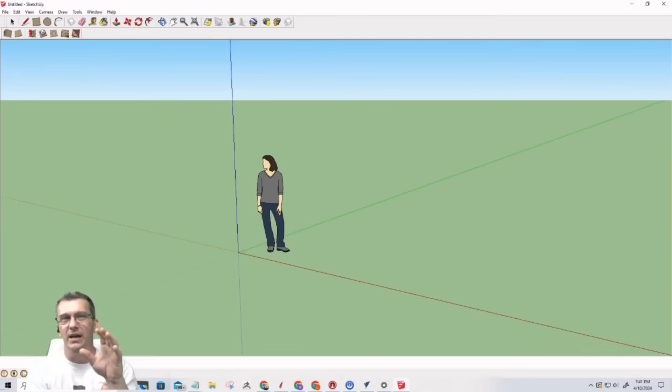When I first started with SketchUp, I knew absolutely nothing about this program. I'm going to give the biggest shout out I could possibly give to Jay's Custom Creations, Jay Bates. Jay, longtime friend, has a website, jayscustomcreations.com. In the SketchUp section of his website, he has a link to the version 8 of SketchUp that I'm working in here. Let me turn off the view axes.

He's got version 8, which is a free version, before they went paid and everything. And his tutorials - not just his tutorials on his website, I like going to his YouTube channel and his playlist. There's like 55 videos in his SketchUp playlist.

I saw one of his videos and I was like, oh man, I want to learn that program. I knew nothing about it. This was when I was just getting started, before CNC, before I got familiar with even designing in Vectric.

I downloaded SketchUp and literally watched every single one of his videos back to back in a row. I spent that time - they're short and to the point mostly, but I watched every single one of his videos. By the end of that marathon, I was absolutely proficient in the software.

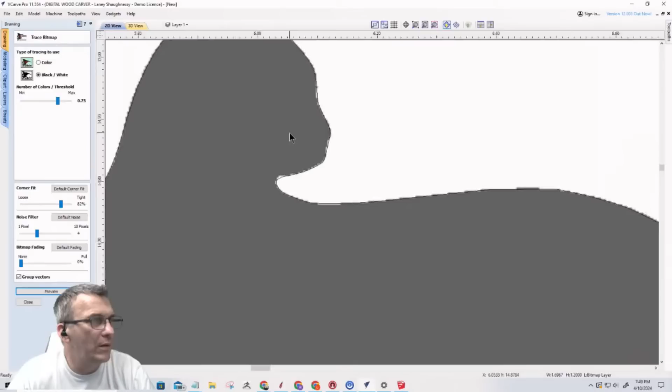Now I'm going to reduce that down to 2 and hit preview again. All right, it's not going to change in there very much, that's okay. Apply to lock that in, and close to close the tool. Then I'm just going to hit delete to delete the image.

So that will be one of the silhouettes that we'll end up using. Let's pull that over to the side for right now.

Now, on the other image, zoom selected, I have some other silhouettes I want to use, some paw prints and things like that. So I'm just going to do a full trace on all of them, then I'll be able to pull whatever one I want. Trace bitmap, turn the fading off down at the bottom, fading to none. I'm going to slide the bar up to 75, I just stick to that, I don't go past it. Noise filter default, I'm going to go 3 on this one. Preview, apply, and close, then I'm going to delete the image.

So again, these are going to be silhouettes, and I'll probably end up fixing the paw prints. But they're going to be silhouettes that I'll pick and choose from.

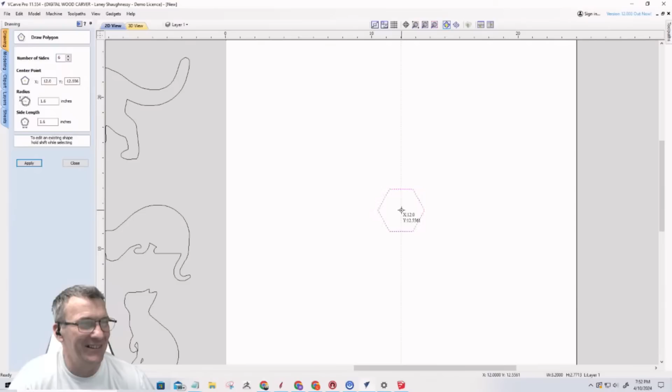Now, because I'm terrible at shapes and everything, the cat beds that are octagon shape, 1, 2, 3, 4, 5, 6, are 6-sided, right? And so what I'm going to do is I'm going to go into a 6-sided octagon here. And I believe that my angle here, and somebody can help me out with this one, I think it's 30 degrees, right? 30, 60, 90, 120, 150, 180, I think. Let me see here. So let me know if it's 60. Is it 60 or 30 degrees?

And what I'm going to do is I'm actually going to measure that. So we have a tool for that, the angle tool. And I'm going to measure from this corner, out here and then over to here. And that's 120 degree outside corner. And a 240 degree. So let's see here. That's 6. That didn't help me at all, ladies and gentlemen.

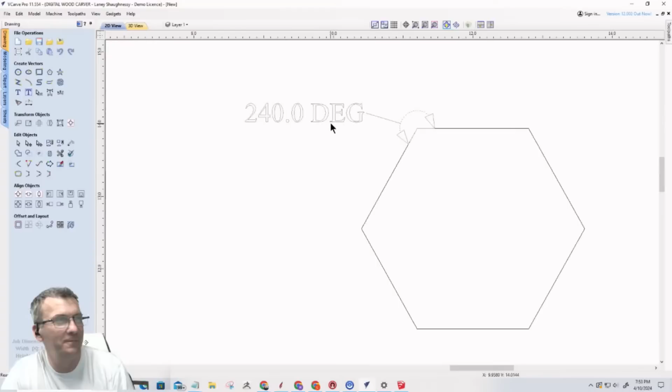Your angle. What is it, John? 60 degrees, Laney. It will be 60. Thank you so much. The way you can figure that out is if you take the number of sides, which is 6, divide it into 360 degrees, which is what's in a circle, a full circle. And that gives you 60 degrees. Yeah, thank you very much.

And I swear, I'm an intelligent young man, but I have the hardest time with shapes. Like when I'm cutting my angles and everything like that, it's like, oh man, what's that angle? So 60 degrees.

That's going for a hex or an octagon, Laney? Hexagon, 6 sides. Yes. Octagon would be 8 sides, right? Wait a minute. I said octagon, didn't I? So hexagon. Thank you very much. And that would be 60 degrees. And an octagon would be 360 divided by 8, right? That would be the math on that? Yep. That'll be 45. Okay, so there we go. See, that's why I got you guys around, to help me out with those things.

And the reason why I do that is in SketchUp here, when I end up drawing this part out, I want to be able to create my mitered angles or my angle cuts in the parts. Now, for the part, I'm going to take this here, and in the size tool, like I said, from long point to long point, I'd like to be around 18 to 20 inches. Let's just keep it simple. We'll go 20 on everything. That's going to be the height and the width.

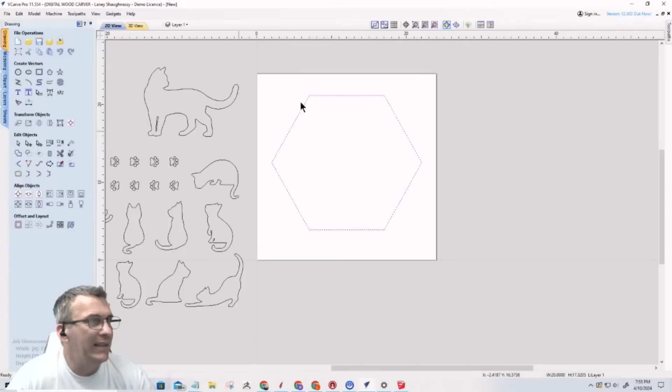So long point to long point here, I'd like to stay at 20 inches, and that's going to give me about 17 inches tall, and that's going to be plenty for this little guy. He's going to have about 5 or 6 of these things, and so there's going to be a 3/4 inch board here, and these miters right here. So bear with me just a second. So point to point. Missed that one completely. Let's try that again.

So basically, long point to long point, that's going to be my measurement, and then I'm going to be in 60 degrees, thanks to Charlie giving me that information. They're going to be 3/4 inch boards. And again, I want my outside dimensions to be 20 on the length, right? So if I offset this inward 3/4 of an inch, just kind of a mock-up, 0.75, sharp corners. We have my long point to long point measurement, short point to short point, and they're all going to be even. So I just need the measurements of one board and I'll be fine.

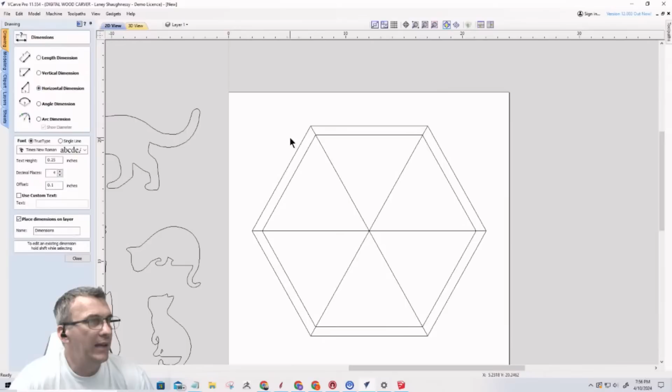With that, I should have from long point to long point, 10 inches, right? And just for kicks and giggles, short point to short point, 9 and just over 1/8 of an inch. And that's fine. I don't care about that. That measurement will come when I do the 60-degree angle. So 10 inches. And I believe, guys, if I look stupid on this one, it's just the length. If I measure from here to here, I'm hoping it's also 10 inches. It is. It's even all the way around.

Okay. See, I'm terrible with shapes, man. I'm great at building. I can build just about anything out of nothing, right? But on angles and stuff, which is terrible because we deal with angles all the time, anything outside of a miter, I get stumped on just a little bit every once in a while.

All right, let's get over to SketchUp here and let's clear this off. I'm going to create a rectangle. And this rectangle is going to be one of my boards. I'm going to use a 1x8 board, 7 1/4 inches wide. I'd like to have a little bit of room inside there, and I think 7 1/4 is not going to be too much. So I'm going to go 10, 7.25, zoom into that.

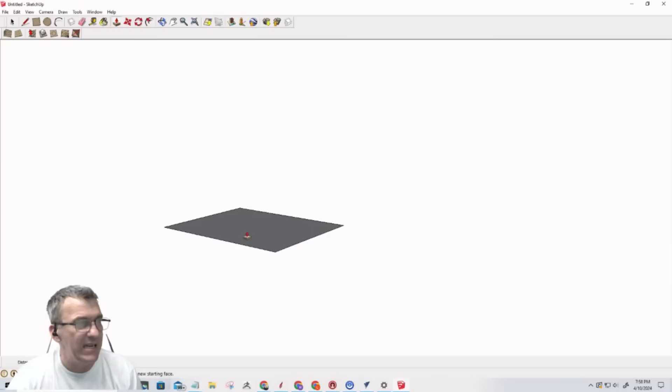I'm going to hit the P key on the keyboard for push pull, and I'm going to pull that up to 0.75. Okay. So with the tape measure tool, we have the 10 inches. So from here to here, 10 inches, and then from here to here are 7 1/4.

Now, I'm going to go into the camera view and I want a front view. So we're kind of looking at it from the side here. And this is my 10-inch side. And just to verify that again, this is my 10-inch side here. So now I'm going to go into the protractor tool and I'm going to click on this corner. And then I'm going to come over here. I'll click up here first and it's going to give me a line, and then I'm going to come over and I'm going to type in 60.

Okay. Now that would be 30 degrees on the cut. Two 30 degrees create a 60-degree angle. It wouldn't be a 60-degree angle. So let me redo that 30. I do know that much. So the angle is 60, but the half of it, that one board would be a 30-degree cut. And I'm going to do the same thing here. And that's going to also be 30.

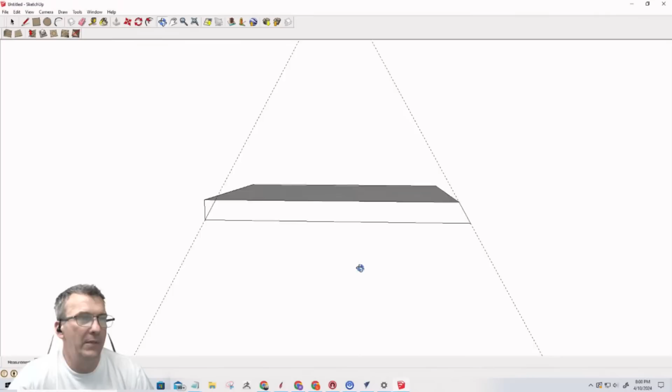Now, I can bring my line from here to here, from there to there. And then I can take my P tool, push-pull tool, and I can push that angle off there. And I can push that angle off there. So there's one of my pieces, right? So now I can get rid of the guidelines.

Now that I have the part made, I can come in and triple click on this. That'll select all the connecting faces. And then G for group to make a component. And I'll hit create. And now I have a component. So again, let's go to the standard view of the front here.

And I'm going to hit the letter M for move. And I'm going to grab this corner and I'm going to hold down the control key because I'm going to move a copy, the control key, just like in Vectric. When you're moving in Vectric, the control key moves a copy. So I'm going to snap a copy to there. Okay.

And then the Q, which I don't know where Q gets rotate, but the Q is the rotate tool, not the protractor. It's the rotate tool. And what I want to do with this is I want to click on this corner and then I want to kind of click right up this leg here. And I want to pull that up and snap it in place, right? So there's the two sides, right?

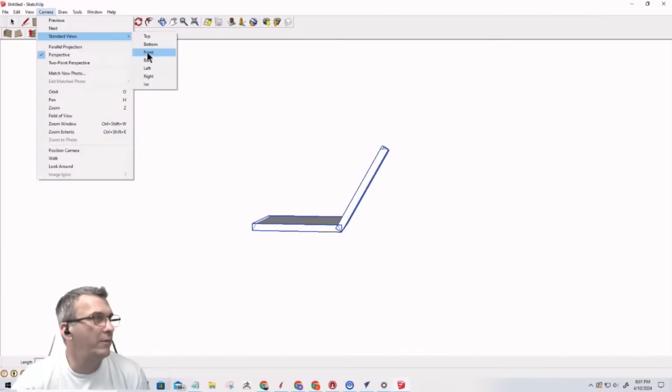Now I'm going to take these two objects, hit the M for move, but let's get back into a standard front view. Hit the M tool for move, hold down the control key. Now I'm moving both of these and I'm going to snap right to that corner. Q for rotate, rinse and repeat. I'm going to click here, click there, and pull that around.

And this is 4 sides. I really only need 2 more. So I'm just going to select those 2 that are there. I'm just going to hit M for move. Let's grab this one here and control key. Now this one's going to be upside down, but that's okay. I'm going to snap right there. Q for rotate, click here, and then spin that around. And if I did my job right, I should end up with one of those parts.

All right? Simple enough. I love SketchUp. I really do.

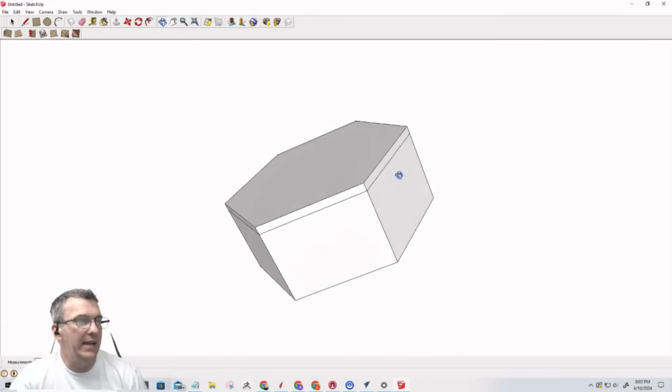Now, the cool part about this is I can come in here with my line tool and I can click here to here, to here, to there, to there, to there, and back to there to create that face. P for push pull and pull the 3/4 out, 0.75, enter. And that is one of my faces there. Triple click, G for group, click create.

And now I can hit the M for move, hold down that control key and drag a copy of it to the backside, right? And I really don't necessarily need a backside. So let me get you square there. When this hangs on the wall, I really technically only need something to hang the French cleat on, right? I don't need a full back panel, but I just wanted to kind of illustrate that. So now I have all the parts for one of those hexagons. Cool beans. All right, so let's go File, Save As.

Laney: Yes. Why not insert that back panel? Inset it in, make it, of course, 3/4 inch small all the way around, and then inset it in 3/4 of an inch. So then you wouldn't have an edge showing. Right, you wouldn't have any end grain showing. Gotcha.

That is a good point. Hold that thought. Let me see something here. Okay. Plus, it doesn't need to be 3/4 inch thick. It only needs to be like 1/2 inch plywood or whatever the case may be. Yeah, I'd make it out of...

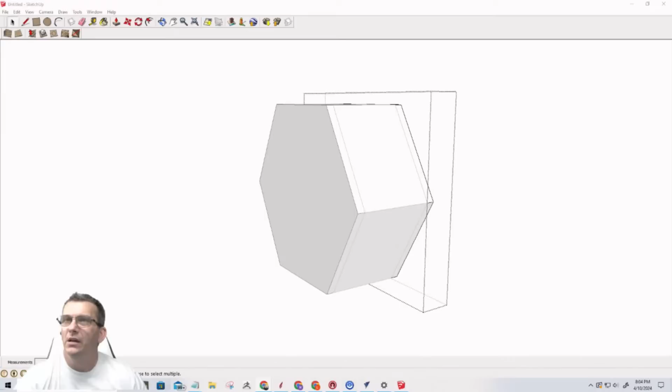So let me just pull this back on the screen again. I was kind of favoring this one because I really like this. I want to make this part too, kind of like the little bed that hangs on the wall, and I'm also going to make the ladder. But anyway, this one, they're using just stained plywood, and they're screwing it together, which is fine. But the plywood is overhanging. There's like a little lip, right?

And this has a little plexiglass panel on it. Thank you, Etsy, for that. And so I was kind of emulating that, but I don't want plywood. I already decided I'm going to make it out of hardwood. I could make it out of plywood, it would probably be one sheet, I could knock it out very quickly, I don't have to do a lot of glue ups. You could use cabinet plywood. Yeah, right, exactly.

But see, they didn't even miter, they just screwed everything to this front panel here with the gaps and everything. They didn't care about their cat, that's what it was. So, all right, let's go back over here.

So now if I select this part here and I hit S, let me escape out of this. Here we go. If I hit S here, I can grab this corner, and I believe shift will keep the axis. Bear with me a second. Function, Alt, Control, is it Shift Alt? Trying to see if there was one particular keyboard shortcut that would keep it centered, but not really. Okay, no problem.

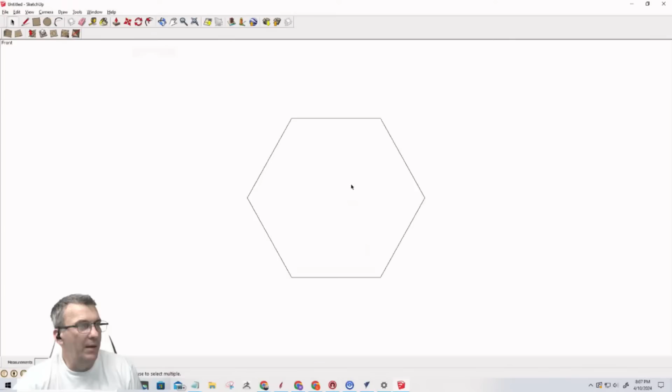So I do like the idea of insetting it. Well, what if you turned it face flat toward the screen and then tried shrinking it? That way you could see if it was shrinking in center and keeping it centered in your box. Right. So if I go front view here, you see it shrinking equally all the way around. If I hit Shift, that's just one side. Control keeps me centered. That makes it equal all the way around.

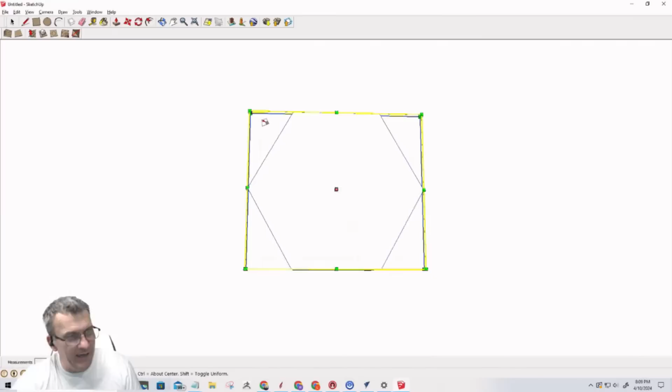Let me see, I want to see if it's the corner one here. I should be able to offset inward 0.75. No, that might have been a little too much. What would that be, 3/8 on each side? Yeah, because that would take 3/4 off all around. 0.375. What is that doing? Oh, I see, it's bringing it down to that size. I haven't done the scale in a long time.

Scale is 1%, 89, 87, 80, oh, it's doing it by percentage points. I don't even want to spend time thinking that one up. So here's what I'm going to do. I love quick and easy. I'm going to hit delete, take my line tool and just draw a line on the inside. It's faster for me than trying to figure out that tool. Then P for push pull. Again, it doesn't need to be 3/4, but I'll just do 0.75 for right now. Triple click, G for group, and then I'll move that in there. Oops, escape.

So yeah, that looks tight. That looks good. So 7 1/4. He's a little guy. 7 1/4 minus, if I go 1/2 inch and 1/2 inch, that's 1 inch. 6 1/4. If I go 1x10, that's a 9 1/2 inch board. 1 inch, 8 1/2. All right, I might do a 1x10.

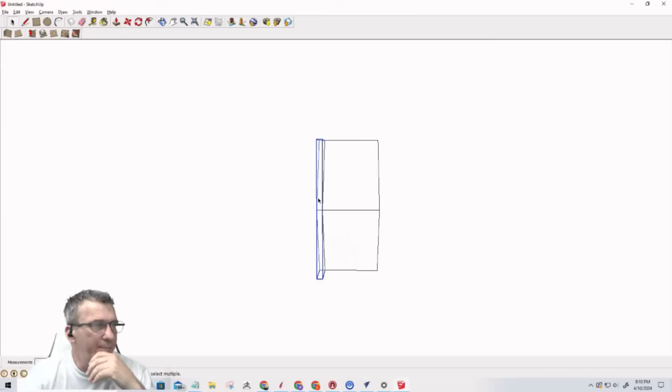So if I'm going to do a 1x10, when I do it to one, since these are copies, it will do it to them all. So this is already 7 1/4. I just need to move another 1 3/4 inches out. So 7 1/4 and 9 1/2 is another 1 3/4. 7, 8, 9, 1 3/4. Yep. So if I pull this out, it's going to do them all because they're copies of each other.

So 1.75, just pull it a little bit in the direction you want to go, and that'll pull that out. So I can deal with that. All right. And then I'm going to make the front panel, because there's going to be silhouettes and it's going to be open. There'll be openings and all that stuff, but I'm going to make the front panel inset also, because I like the idea of no end grain showing this way. I'm okay with the edge grain here.

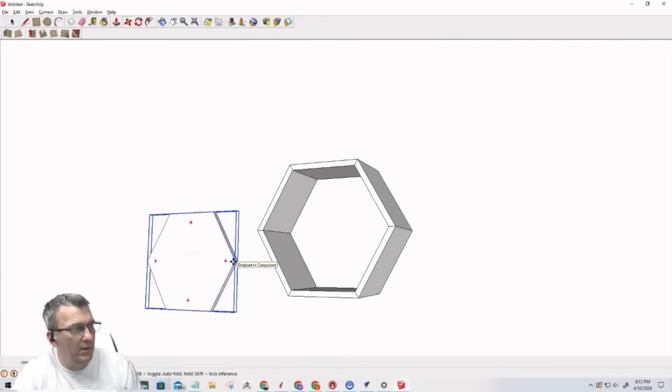So select this move tool, grab that bad boy, holding the control key down, let go of the control key, and then just snap that right there. So there's my front and back. Okay, so that's one part down. So that's going to be my hexagon. And I'll be able to do like offset cutouts if I want to make a window there, if I want to do the silhouette of one of the cats and all that stuff. We'll do all that in Vectric. Right now, I just want my raw parts. So that's one part. So let's go ahead and move that to the side.

Now, my next part, I want one of the square boxes. For the square box, I'll just buy 1x10s for it all. I'll miter these. It'll be mitered, so it's again nice and clean. And again, I want to stick to 20 inches, and this is 17. So I'll keep my 20, but I'll have different sizes on the height. So let's come over here. Let's go 20, comma 9.5.

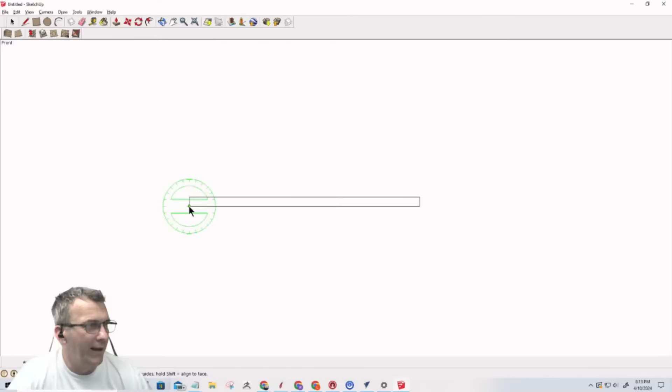P for push pull, 0.75, enter. And then let's get into the camera, standard view front, tool, protractor. The protractor tool is the only tool that doesn't have a keyboard shortcut. It's stupid. Anyway, here to here, and I'm going to go 45 because this is going to be a mitered box. From here to here, 45. So you just turn it in the direction you want it to go and then type in the number and hit enter. Take our line tool, go from here to here, from here to there.

P tool, push pull. And of course, the tools are up here as well. You can come and click them. I'm a big advocate of keyboard shortcuts in SketchUp. Okay. So that will be my top and bottom of my box. Let's select that. G for group. And then might as well hit the move tool and control key to pull that up. And this is the thing: when I pull it up, I can actually give it a distance, a measurement. So I'm going to go up 11 inches.

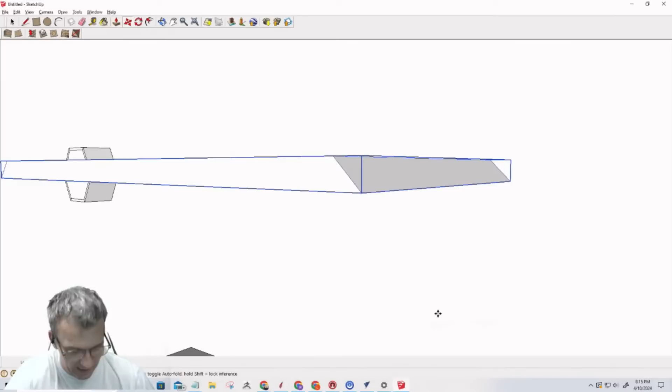Now, need to flip this one around. So if I right click on it, I can flip it along my red axis, my green axis, or my blue, X, Y, or Z. When I flip it along the red axis, that just swings it around this way. It doesn't do anything. It goes length to length. When I flip it along the green axis, that also doesn't make any change. Make sure I'm the only thing that's selected there. Yep. Whoa. When I flip it along the blue axis, that's the flip this way, right? So that's going to get my two miters facing each other.

Now, the cool thing about this is I believe I went straight up with this, and I didn't vary left or right or anything. So I can simply take my rectangle tool, and let me escape out of this and click off of it. And let me see if I can zoom into this closer so everybody can see it clearly.

I can just take my rectangle tool and click down here, come all the way up to this corner, and then over to that corner to create that piece. And then I can use the push-pull tool, and I can either pull this way or I can pull this way, right? Whichever way I want to go. I'm going to go ahead and pull this way and just pull it to there.

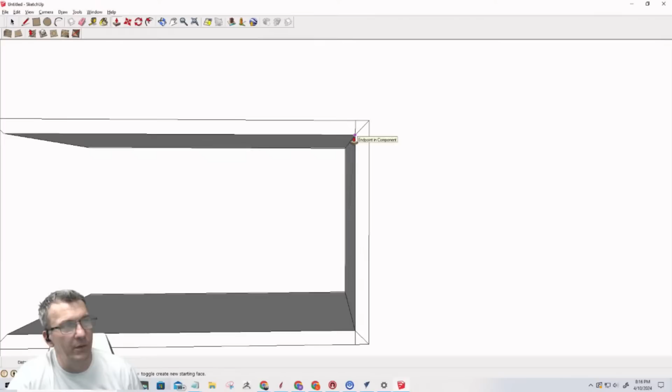And these are grouped. This is separate. This is still individual faces and everything. So when I come in here with my line tool, when I draw a line here, I'm drawing it on those open faces. And when I use the push-pull tool, I'm pulling that face, even though it's inside here and hidden, and I can hide this so you can see what I just did, hide, all I did was take that off. And the software is so intuitive and so smart.

It knows that I'm working with these components. I can't work with them unless I'm inside of them. I got to double click. So they're just there. It's like a grouped item in Vectric, right? And so I can draw that line. I can use the push-pull tool, push that angle off of there. And it's working with that open object, even though there's a component right there in the way, it's kind of ignoring the component because I'm not inside of it. And I mean, that is so intuitive and handy, it's great.

So push, pull, and then I can pull over. And you see how it says offset limit 9.5. It's saying, hey, you can only go 9.5 inches, and that's what I want. And I'll just type in 9.5 and hit enter, just so it knows that's what I'm trying to get to. So once again, if I take this bottom piece and hide it, you can see I've got that mitered board there. And so now group that one together, undo the hides, unhide all.

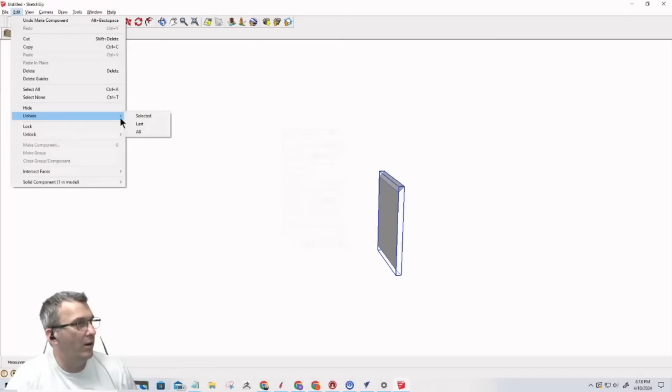Right? And now I can just move, hold the control key down and drag this down and snap. I grabbed it on that back corner. I can snap it right to there, even though it's backwards, but that's okay. I can flip it, right click. And this time I am flipping along the red axis to flip it this way. And I just need to pull that over and snap it in place. It's so fast. Hit your escape key or your space bar to get out of that tool when you're done doing what you want to do, or it keeps kind of moving parts around.

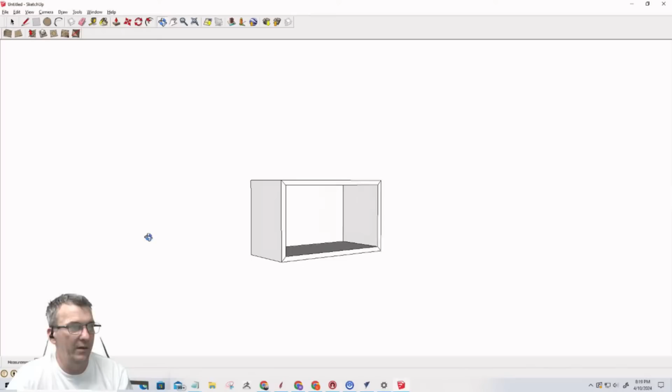But SketchUp, if you can just get familiar with the basics, drawing your shapes and extruding them and pushing them off, and then once they're shapes, group them together and stuff. Man, it's so great to be able to do that. And now in here, this is just a simple rectangle tool. So I'm going to take my rectangle and draw a rectangle on the inside there. And then right over here, I can just pull that inside like a drawer, right? But I just want to pull it 3/4, 0.75.

And triple click, because these are grouped, right? So it ignores the group. So triple click, and it's only going to select all the faces of that open object. And then G for group. And if I go move, I can move that out, and you can see now it just grouped that area right there, right? And then move, control key, drag a copy over here, spin that bad boy around. I'm going to grab it right on the back corner so I can just snap it, and it snaps right in place. So that's one of my boxes, right?

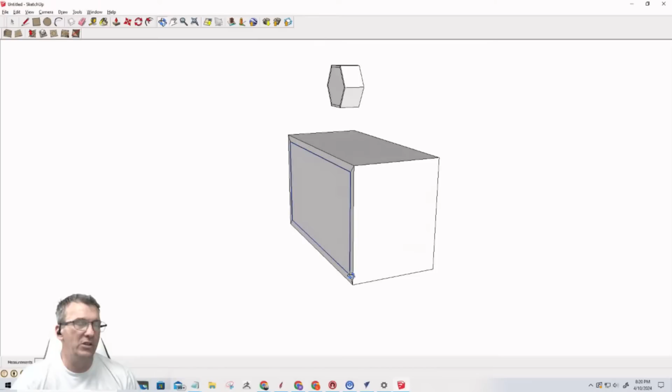Now, I would do this for all the different size boxes that I want. Now, if I said, okay, I'm just going to keep my box height the same so I can have a little entry door, I could draw all those vectors in here, and I can make all the little doors, openings and all that stuff for the silhouettes. But if it was just like a round opening or a square, I could do all that right here. And when I import it into Vectric, it'll have all those vectors there, or I can just draw them in Vectric, right? Figure out what I want to do. But just for preview purposes, I'll do this one.

I'll leave it alone and intact, but I'm going to hit M for move and hold down the control key and grab a copy of this. And I'm going to make this one same height, shorter. So we'll come in here and triple click to get in there, or a double click. Let me hide this face first so we can see what we're doing. Hide. This one, I'm going to scale it down. So this box right now is overall 20 inches in length. I'm just going to bring it down.

Really doesn't matter what size, I just want to bring it smaller. So I'm going to pull this in, and I'm just going to pull in until I think I'm happy. Now, I don't want this to change, and you see what happened because it's a copy.

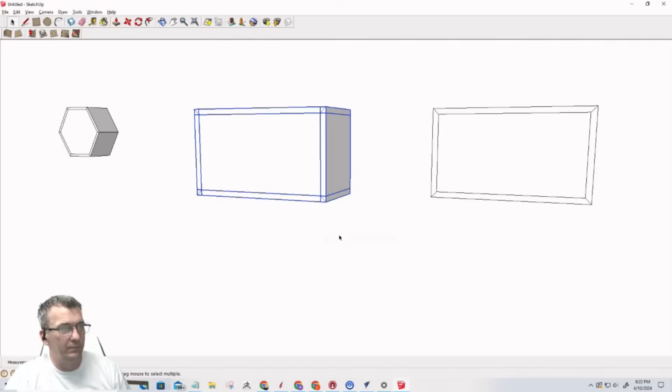I need to select this, right click, and make it unique. Make it unique means it's not the same as the other copy. So when I change something, it doesn't change my original, right? Because it'll change whenever you make a copy of it.

So I'm going to pull this in to here. Good with that. And then here, these guys right here, I can't push and pull an angle. That's the one thing that I can't do. So when I'm in this part and everything, if I try to push pull, it doesn't, it only wants to kind of go this way, right? And that would be kind of a cool looking box too. But it doesn't let me kind of push and shorten up and all that stuff.

And that's okay. I'm just going to make a 45-degree right here and cut these off and everything because I can do that. So if I come in with my tape measure, and with my tape measure tool, I can kind of create like guidelines, if you will. I can create a guideline right here so I know where that edge ends.

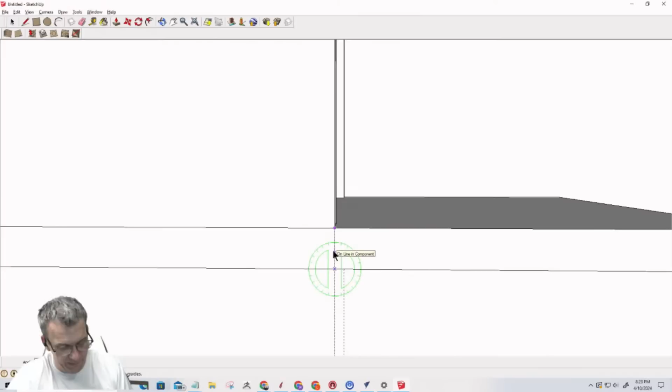And the protractor tool, no keyboard shortcut for that. I keep wanting to hit P for protractor, but that's not the case. I need to not protract at the bottom. I need to protract at the top. So hit escape, click here and down to there. And this is a 45.

Now all I have to do is just draw the line. Well, click into this part first, then draw the line. P for push pull, and now I can just push that whole thing away, right? And because these are copies of each other, not of this, but they're copies of each other, it does them both at the same time.

Love this program. All right, so edit, unhide all.

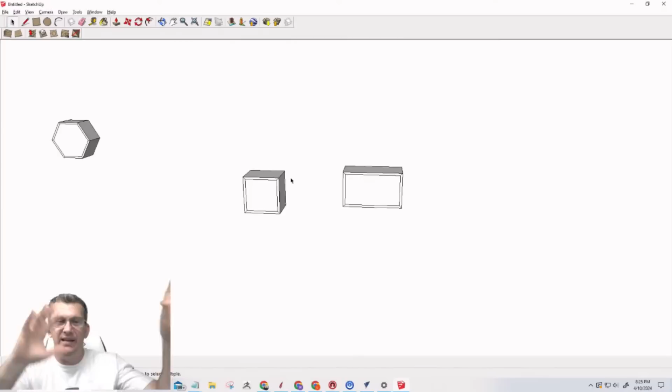To, we'll get out of that, unhide all, and then just move this face and snap it into place, right? So let's grab that, hit delete. So now I got a small cube. I'm going to stick with that because I can make multiple copies of that, different copies of that, right? That'll be just the 3 shapes that I need.

The last thing I'll do here is on this side here, I will go ahead and put the doorway in. So I'm going to take my ruler and I'm just going to come up 3/4 of an inch, 0.75. So it just kind of gives me a guideline of where, you know, my miter is and everything.

I'm going to, let's go another tape measure tool. Go another, yes, lay down and go back to sleep. He didn't like me slamming the thing.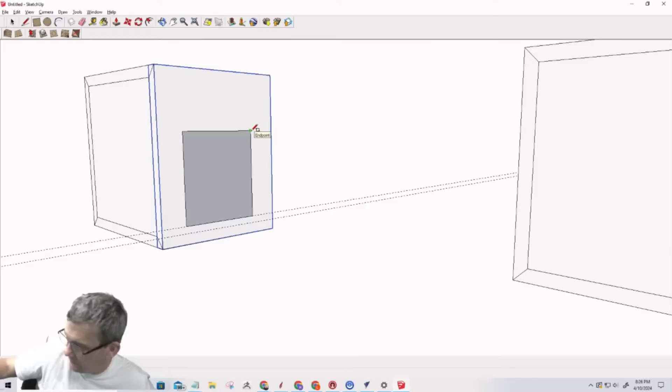So let's go another 1/2 inch, 0.5. Now there, I'm just going to pick a spot here. All right. Shh. Or you're going to go outside. Not outside, but out in the living room. All right. So here's this.

Now, once again, here's what I did wrong. I drew this component, or I drew this shape on a closed component, not on the inside. So I can't push that hole out or anything. I need to make sure that when I'm drawing shapes and everything, if I'm planning on pushing and pulling apart or something, then this part has to be clicked into. We got to be inside of it. We've got to be inside of it.

And so now I'm inside of it. And what I'm going to do while I'm inside here is I'm going to take my tape measure tool, and I'll kind of be consistent here. So let's go in.

1 1/4, 1.25. That gives me my little window. It doesn't really need to be that big, does it? Let me do that again. So let's go in another inch, 1 inch.

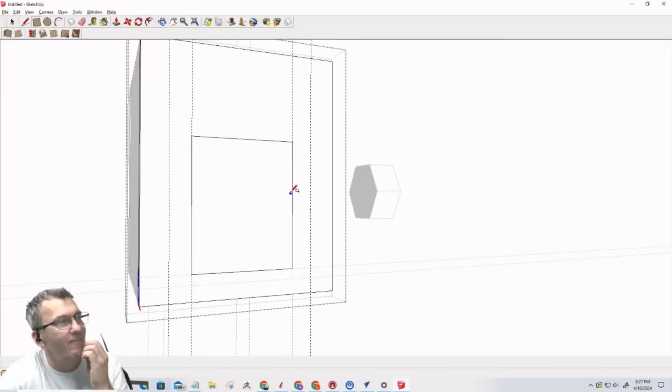1 inch, that's good. Take that rectangle, and I'm going to use my guidelines and just come in here, click there, and then draw an arc from here to here, pull that up a little bit. Now, once I do that, this is what I love about this program. Once I connect that arc to this line, I can just select it and hit delete, and it automatically joins those two together.

It's like almost taking the scissors in Vectric and trimming them together and then joining them and everything.

Now I don't need the guidelines at this point. I'll get rid of that one and that one, that and that. And I'm going to do a push-pull here.

Push-pull, and then 0.75. Now you can just push-pull and let go when it gets to the limit, and it'll tell you where you're at, or you can type in a hard number. I like to type in a hard number so it knows how far I'm pushing to. So now that part has those two openings there and everything.

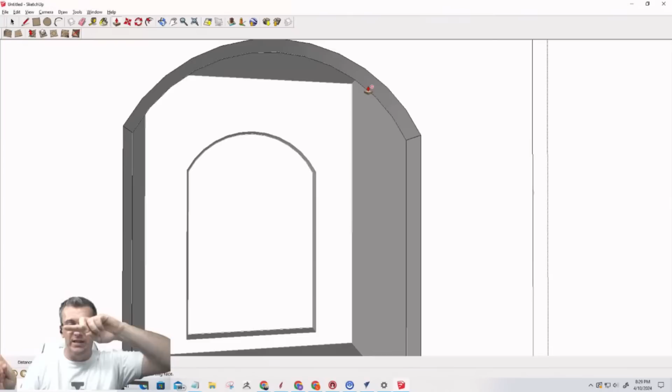Now these arcs are segmented. I don't know if you can see those straight lines. They're segmented in SketchUp. When we import these vectors into SketchUp, there's going to be an option to change arc segments to arcs and all that stuff, and I'll show you that when we import it in. So that's going to be my little opening.

We'll put a little silhouette on the front of these, and then I'll make the other opening in Vectric. So let's save the file and take it over to Vectric.

So let me drag this one. I don't have to, but let me just kind of put these in proximity of one another. Don't have to explode them, don't have to do any of that stuff. I just need to go File, Save As.

Now, the cat bed that I said I liked on the wall, I'm going to draw that in Vectric. Don't need to draw it in SketchUp. I'm going to draw it in Vectric because I want to show you that you can do that as well too. All right, so wall boxes.

Now I can come out of here, and in Vectric, I don't need this anymore. That was kind of my layout, right? I like if I can cheat anywhere I can, to get the information I need, I'm going to do it.

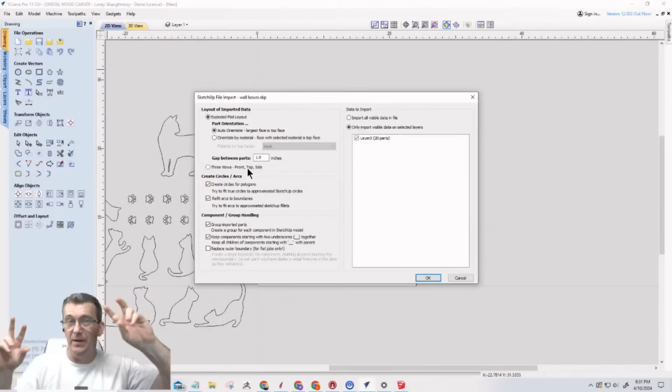The only time I would want to do that is if there's some kind of ornate edge I need to maintain, an OG edge or box over that I've drawn in SketchUp that I want to maintain to maybe do a 3D cut or something like that. Then I would import kind of a 3-sided view, right? But in this case, it's just going to be a flat view.

Now, I don't necessarily need to auto-orientate it by a particular face. But if I did, I could have painted with my paintbrush in SketchUp. I could come over here and, let's say, explode this piece right here. I could paint this outside face. Oops, hold on.

I had everything selected. I could paint this outside face a color, and that color is A06, right? And when I save the file, that color will be in my dropdown in Vectric. In here, I could say orientate this, and I could come in and find that because it'll know the color in the files. I could select A06 and it would bring all those faces up, right, if there was a bunch of joinery and things.

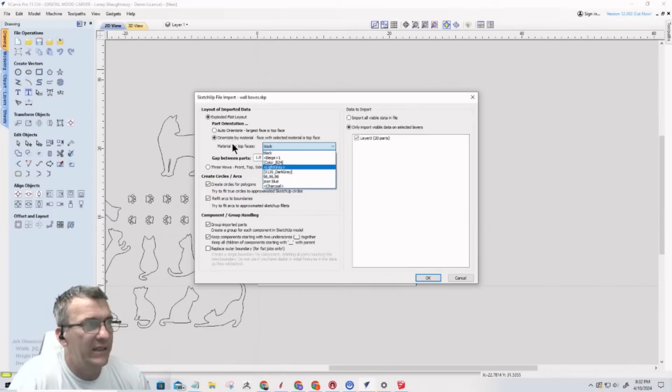But I don't need to do that. I just want it to bring them in. So auto-orientate—I'm going to be moving the parts around myself. So a 1-inch gap is fine.

Now, create circles for polygons, so those angles and everything—I want it to create arcs and circles. Refit arcs to boundaries, redraw arcs to boundaries. I want to keep my groups as groups and keep the components kind of together. And then there's 20 parts that are coming in, so I'm going to click OK, and it's going to lay out all of my parts here.

Now I've got my front and back. Okay, and this is where sheets are going to come in, right? I could create all my sheets and put all these parts on a sheet. Or if this was one big sheet and it was plywood and I was cutting all the parts out of that sheet, could do that too.

That kind of thing. Now I'm going to cut the angle cuts in here. I could just as easy take them over to the miter saw or the table saw, right? Tilt the blade, cut and everything. But I want to show you guys and girls how to use your chamfer tool and or just a router bit, right?

So I could lay everything out on one sheet if it was one big sheet and nest it to get the best parts to fit, right? Get it to nest and fit. But since I'm going to be gluing up kind of individual panels for this and everything, I'm going to create individual sheets. So some sheets are going to be long where I can cut all my sides for my little boxes out of, right? That don't need to be just a 24 by 24 inch. They could be just a 1 by 10, by whatever. And then some are going to be the square panels.

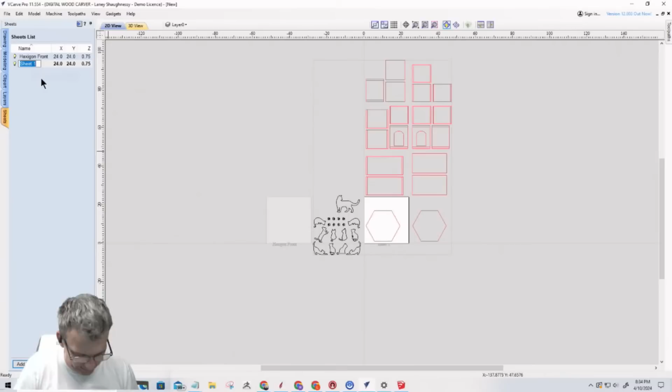So let's start with the square panels. So sheet 1 and sheet 2, I'll rename them. That's going to be my hexagon front and hexagon back. Is it A-N or O-N? I think it's O-N, right? Okay, so that's going to be those two parts.

And I'm going to take this piece here and I'm going to just move it to that sheet. Okay, and then let's make that sheet active for a minute, and let's get that centered on the sheet. Now I don't have any small parts in here that I could kind of fit, so I'm just going to go ahead and center this one on the material.

And that's going to be my 2 sheets. Now I'm actually going to be making one tool path, multiple cutouts on the front, one tool path, because I'm going to make 3 of these boxes, these hexagon boxes, but I'm only going to design 1. There's only going to be a tool path of the silhouette that gets cut out of them. I'm going to have a couple different silhouettes. And so I'll put them on their own layer and I'll create my tool path to cut one with this cat, one with that cat, one with this paw, whatever, right?

So that kind of thing. The side of my boxes, the inside of my boxes, they're going to have a silhouette on them too, on the front and everything. One of them might have a plain plexiglass window. I kind of like that concept too. But so that's going to kind of be that deal.

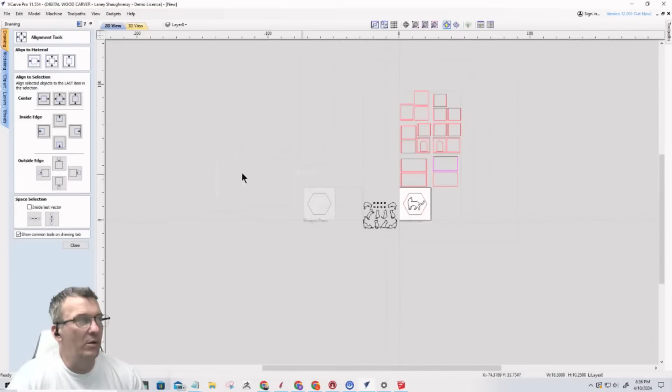So my next sheets for this, let's get up close and personal with these things. My next sheet, add new. This one is going to be my small box, my small box. I could probably get 1, 2, 3. I could probably get my box sides out of 1 by 10.

Let me take a measurement real quick, just a rough measurement. So out of a 36-inch board, I could get 3 pieces. All right, so we're going to go on the sheets. This one is going to be my box sides. Rename: box sides A. I'll just do A because they're going to probably be more than one board.

And edit that one. And I want it to be 36 inches long. I'm going to go 35, 35 inches long. I'm going to go 9.5, or 1 by 10, 9.5, 3/4 inches thick. Click OK. And I need 2 of those.

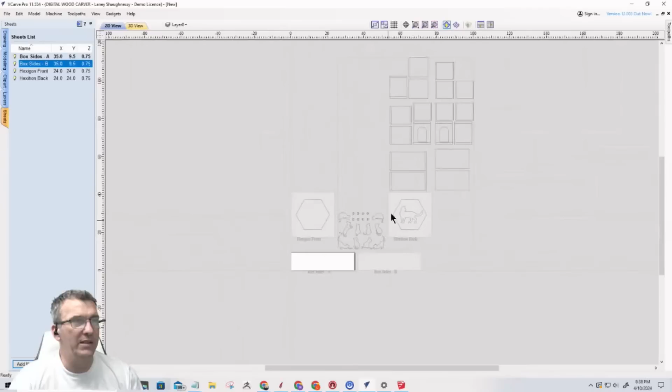So that's that. Now for right now, that's good enough for the moment. Let's go ahead and get back into our main sheet where everything is. And let's select this, and this, and move it to box side A. This, and this. Move that to box side B. Okay.

Close. Now, these vectors, everybody, these vectors are grouped together, right? So that's a group, and that's a group. Okay, so I should be able to draw a rectangle around the perimeter of my board here. And of course, I missed it by a long shot. Let me redo that.

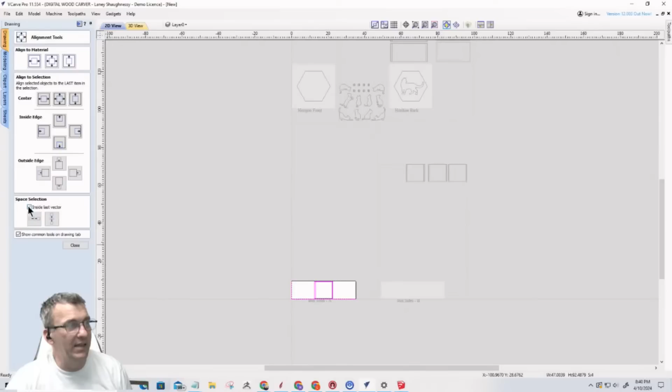Now I should, if I'm a smart boy, be able to select these 3 items first, this rectangle last, align them to the center of that last rectangle and stack them on top of each other here, and then space them inside that last vector horizontally, and it should lay them out and space them for me. Equal distance. So the distance from here to there, to there, to there, they're all equal.

So I can do the same thing here. Select, so hold the shift key down, select that rectangle, align to the center to stack, space, equal distance. All right. Now you have to understand that this is a mitered side, right? And it was imported in as a flat vector. So there are vectors on top of vectors here. There's the vectors for the inside face.

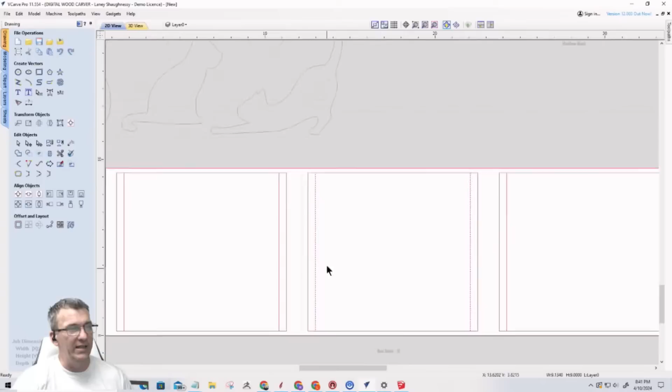Let me ungroup one of these so you can understand what's going on here. Ungroup. So we have a vector for the inside face, which is right here. If I were to grab that and move it for a minute, that's that inside face. Now there's also a vector here, which is the outside, right? Those two vectors, the little boxes here, create the offset distance of that angle, that 60-degree angle. So this line right there is the inside top of the angle, and this line here is the outside bottom, right? Long point to short point. That distance, that's what that is.

So when we're creating the tool path, we don't need this line. This is a rectangle right now. We don't need this span or this span. We only need this line and this line to cut the miters, right? We might need to add a couple of lines, but those are the lines we're going to be using. And then the outside perimeter is the profile cutout, right?

Now, of course, you could say to me, Laney, wouldn't it be much easier to take your 1x10, go over to the table saw, cut your 3 pieces, put your box together and all that? Yes, 100%. I'm just showing those that might not have a table saw or a chop saw, but only have the CNC they purchased, how they can create the tool path to make these cuts. But I'm strongly going to advocate that if you have a tool, use that tool for its best purpose. This tool is better designed for cutting out silhouettes and shapes and things like that.

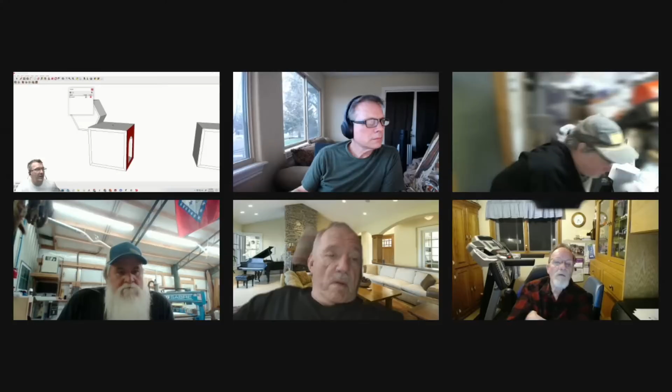So if we went over to SketchUp here and go to Window, Layers, I could have selected this part, and I could have added the... let me see if I can actually move it to a layer. Flip along, soften, zoom extents, dynamic components. No, I can just add it there. And that layer has a particular color. It's visible. And then I could have... what am I trying to say?

I could have drawn in that layer, and I could have named it side A, side B, part A, part B. And when I imported it in, it would have imported those parts on all their layers. So while I'm on a layer, I can't just, I wish I could take this and move. Let me see here. Bear with me just a second.

But could you have printed text on it, say like box A, panel 1, and then box A, panel 2, and then when you import it into Aspire, that would have been printed on that part, and just don't give it a toolpath? Yeah, I could have, and I believe it would import. I don't think it would import that. Let me see here. Let me hit edit, undo text.

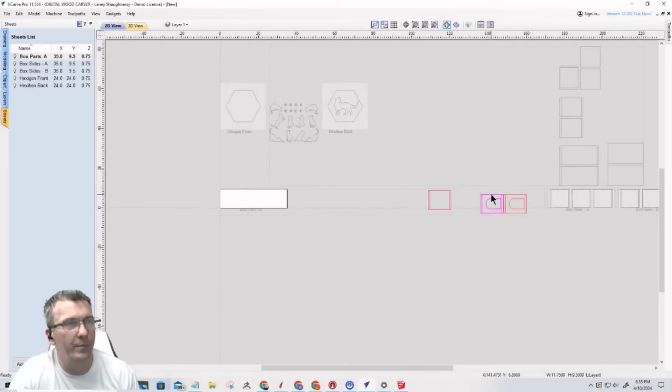What I'm doing now is this is going to be my box parts. And I'm going to take these 3 parts right here. I'm going to move them to that sheet. And on that sheet, I'm going to select this part, hit the 9 key twice, and I'm going to select these 3 items.

Again, I'm going to draw a rectangle around here. I'm going to select these 3 items, hold down the shift key, select that rectangle last, align to the center. Nope, that was dumb. Align to the center. There we go. And then space equal distance. Now these are just pushing that 35-inch board. So let's go ahead and change that sheet size, edit. And I'm just going to give myself another inch, 36.

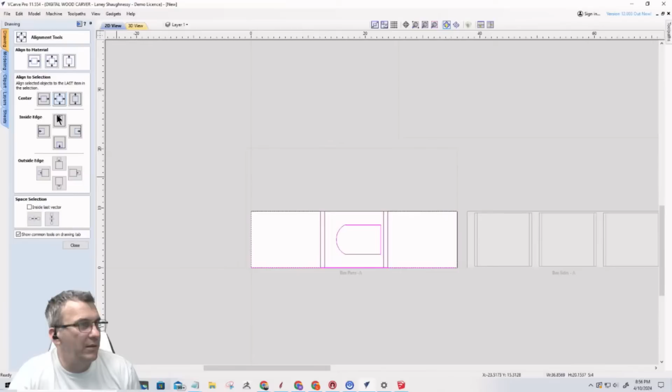I'm going to come in here and select that rectangle again. Let me do that. Just going to pull them off for a second so I can extend this one out that extra inch. Okay, select these 3 items, select that, and once again, align to the center, and then space, and that'll give me plenty of room. I should have plenty of room to get a bit in there. We'll find out. If not, then I'll change different parts. So now it comes out, just kind of laying the parts out.

So now here, let's do a tool path on this. We're going to ungroup these parts. This vector is all by itself. That's good. This is my perimeter vector. And then the inside vector is that distance there, and there is that 45-degree miter distance, right? Well, I don't need the top line and the bottom line on this shape. So I'm going to go into node editing, right click and delete that span, and then delete this span. So what I should be left with is one line over here and one line here. Okay.

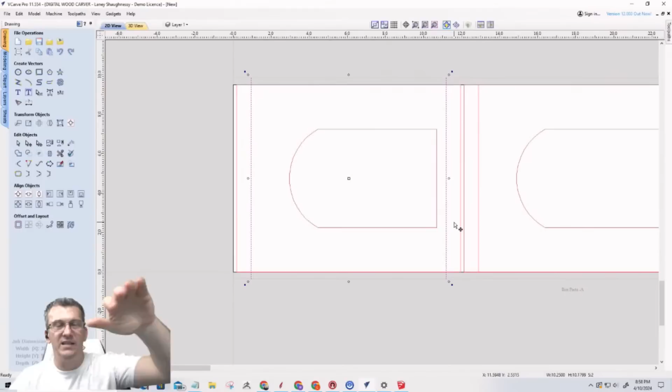On these lines, let's get out of node editing mode. I'm going to hold down the shift key and, oops. Well, bear with me. I'm just going to hold down that shift key and extend them slightly past the edge of my board, because when that 90-degree bit comes to do the cut, I want it to go past the board to give me a nice clean cut. Again, this is under the assumption that I'm miter cutting this on the CNC versus the table saw or chop saw or radial arm saw, that kind of thing.

So now I've got my 3 vectors for my tool paths: my profile, my chamfer, which is going to be the miter cut, and then my pocket cut right here. So let's look at the tool paths on this. We'll do the window first, pocket tool path. But did it arch that window and take those segmentations out of it automatically? It did. When we imported and told it to change polygons to circles, it created those arcs. Got rid of those segments automatically right upon import.

So yes. I'm going to type in Z equals up here, 3/4 inch. I'm going to select that. I'll be using a 1/4 inch end mill, and this is going to be my door cut underscore 0.25 end mill. Calculate, and that's just going to be that cut.

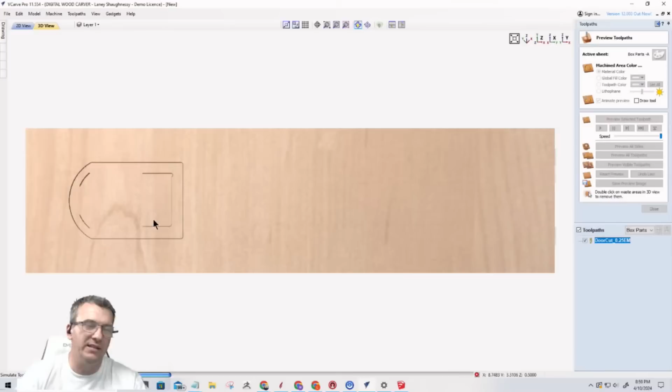Now, I don't need to do a pocket cut. I'm a goofball. This is a profile cut. I'm cutting the door out. There's no sense in wasting time on a pocket cut. So let me stop that. That was an idiotic move on my part. That is going to be a profile cut because we're cutting it out. So let's go back into the profile toolpath.

Zero, 1/4 inch end mill, inside the line. And I'll throw a tab in there. Edit the tab. We'll go 2 tabs. Right there will be fine. And then door cut out, 0.25 end mill. So we'll go ahead and reset that, preview that toolpath, and cut that part out. That will be the cutout.

Now for the chamfer toolpath. If you don't have version 10, 10.5, 11, 11.5, when the chamfer toolpath came out, if you're still rocking 8 and 9, I'll show you how to create that 45-degree miter cut with a 90-degree V-bit without the chamfer tool. But here we're going to start at 0. We're going to use a 1/4 inch end mill. Get down to my, why am I not seeing my end mill category?

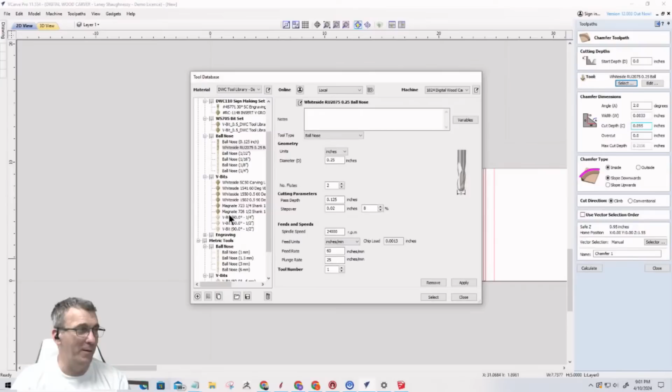Because I'm not looking for an end mill, you goofball. I'm looking for a miter bit, a V bit. I was like, why am I not seeing my end mills? 90-degree V bit.

And then on the line here, now this is very important, okay? The line, I don't know how well you can see that, but the arrowheads are pointing to the deepest part of the cut. This 45 from the inside of my board is coming down, out and down, right? So the arrows, the lines need to be pointing outward, which they are, but they need to go the full,

3/4 of an inch. And so 0.75. So 3/4 of an inch wide, 3/4 of an inch deep. Those arrows should extend right to the edge of my board here, my profile. Okay. So there, and if I hold the shift key down, wrong direction, right? So that's because my start point needs to be swapped around.

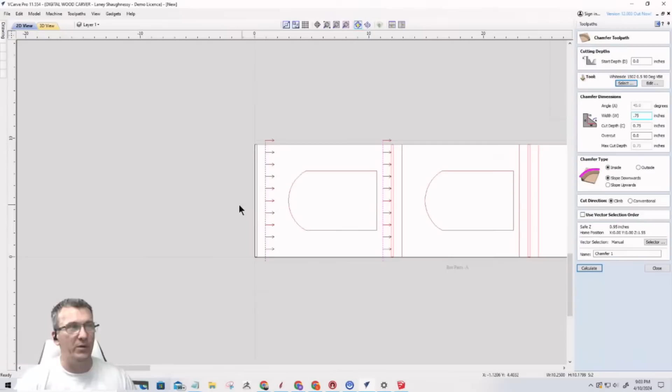Let me close this for a second. And in node editing, this start point right here needs to be down here for this line. So make this one the start point. Make that the start point. Now, when I go back into that chamfer toolpath and I select those lines, we're going to have our 1/4 inch end mill, or a 90-degree V-bit, sorry.

We're going to be 3/4 of an inch on the cut width, and it'll automatically set the depth because it's a 90-degree bit, keeps it even. It's not going to be an outside cut cutting in, upward or downward or anything like that. It's going to be an inside cut. We're starting on the inside, working our way out. And we are sloping downward, inside sloping downward.

And so when we calculate that toolpath, that's going to create that miter cut there. All right. And now, we're going to be doing that on each of these parts, right? So I could technically come in here and go into node editing mode, delete that top span, the bottom span, same thing for this one, delete the top span, the bottom span.

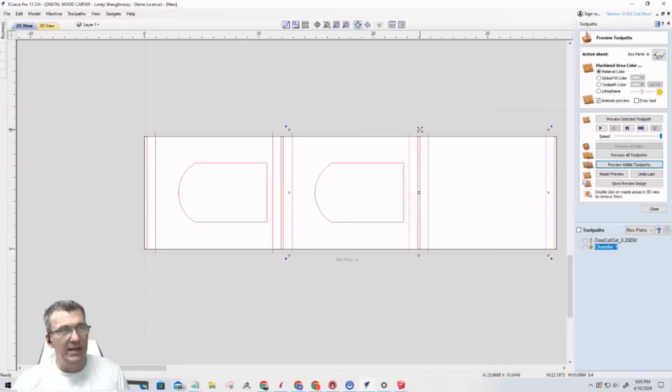On my lines here, let's get out of node editing mode. On my lines, I can extend them out. I'm going to extend them to the same length as they are. I'm holding that shift key so it's the same size. And what I did is I grabbed this to size it, and I just pulled my mouse over to the end of this line that was already sized. So it brings those lines to that same height. Make sure you're zoomed in.

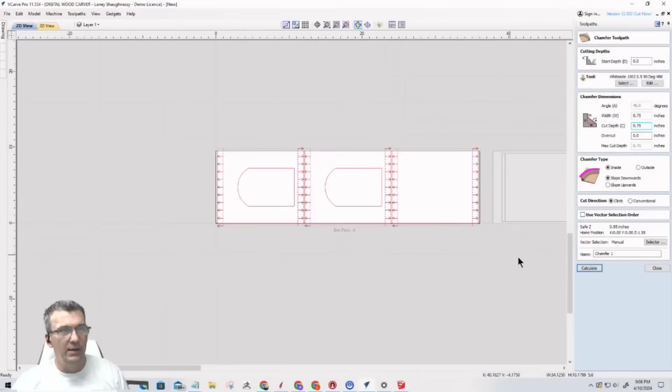And then now every other one, I need to go into node editing mode, make the start point, skip that one, and then this one, make the start point. So let's go back into that chamfer toolpath, hold down the shift key, select that, that, and that. Let's try that again. There we go. Select this line, that line, and calculate. Okay. Preview that toolpath, and that's going to create each of those miter cuts.

Okay. And then, of course, on that profile cut, the door cutout, I could just as easily hold down the shift key and select this door, go into edit my tabs and throw in the tab here and here, and calculate. Right. So those parts, they're done. Now these, front and back, or side and side, and then another side of a box, these are all still box sides. They're not the front and the back and everything.

Now here for the silhouettes, let's go back here and just look at this one real quick. This is a front or a back, that hexagon shape and everything. So this is going to be a silhouette, and this is going to be a profile cut, cutting on the inside. And I'm just going to use an 1/8 inch end mill to make sure I can get kind of tight in these corners and stuff. And depending on what animal, I'll use an appropriate tool for the job. And if I can't, then I'll size this up to where I can. But I should be able to use an 1/8 inch on all these.

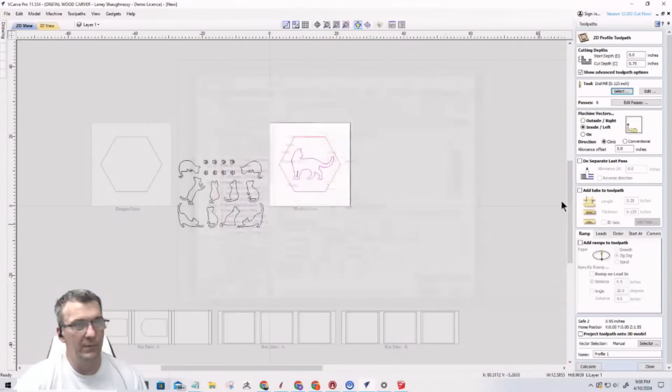So this guy here would be a profile toolpath, cutting all the way through. I'm going to use an 1/8 inch end mill on the inside of the line, calculate, and then I'm going to do a profile toolpath on the outside of the line.

If I didn't want to do tool changes and stuff, I could go ahead and just use the 1/8 inch bit, because I have a 1 inch long reach bit. I could do an 1/8 inch bit on the outside profile as well, or I could switch to a 1/4 inch end mill. It just depends on the situation. I'll leave it at that.

But these are going to be inside, and I am confident that in my machine and its setup, when it cuts this part and I glue my hexagon together, this part's going to fit. It's probably going to be a little bit tight. I'm not worried that it's going to be undersized with a gap. I'm confident that all my parts, as long as my material's the right size, will be the right size.

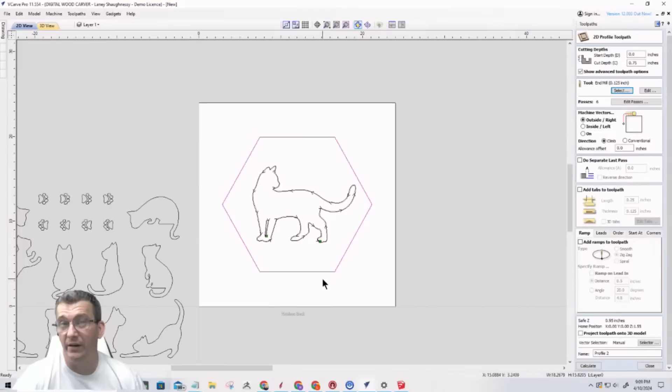Now here's where it would vary. Let's say I glue up my hexagon pieces. Let's say I were cutting them out of a glue up, or out of a piece of lumber that I ran through the drum sander. Let's say it was rough lumber, some pretty wood I want to make this box from, and I don't hit 3/4 of an inch. This design was designed on 3/4 inch boards, 6 of them.

If my boards are thinner than 3/4, that hexagon is going to be a different size. So if I drew it for a 3/4 inch board, but I run it through the drum sander and I'm 0.70, 0.68, whatever, then I am going to have a gap when this gets cut out. So if you're going to use the CNC to cut your parts out, make sure your parts are what you drew and sized it up for.

Otherwise, go back into SketchUp and make those alterations. Get all your milling done, jointing and facing off, cutting down to size, running through the drum sander. Get all your square boards made if you're working from rough timber. Once those boards are cut down to size, make whatever alterations you need in your design. If you drew your design for a 3/4 inch board and come out with a 0.7 inch board, you'll wonder why that part isn't fitting. There's going to be an air gap.

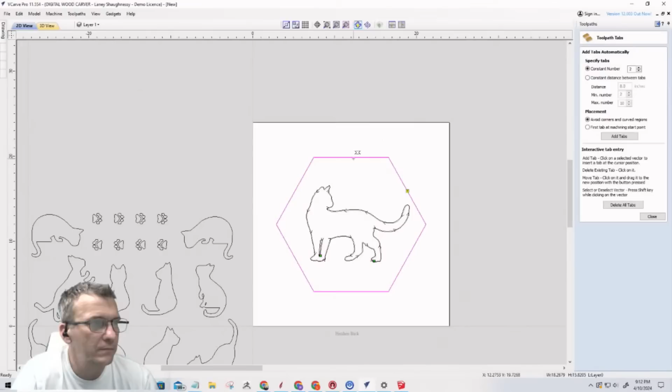I'm going to work with a pre-sanded four-side board straight from the box store. I will check it, of course, to make sure that I'm at 3/4. If I'm not, I'll make my alterations. But as of right now, I'm confident, so I'm going to go ahead and just cut it. I'll throw some tabs in there. All right, calculate. So we preview those two tool paths.

Now, on one of my faces on the hexagon, I'd like to do a pocket lip and then a full cutout, like an offset, so that I can lay a piece of acrylic in there, like a window. So on my second window, we'll do that one real quick. I'm going to offset this vector inward, and I'll go 1/2 inch, 0.5.

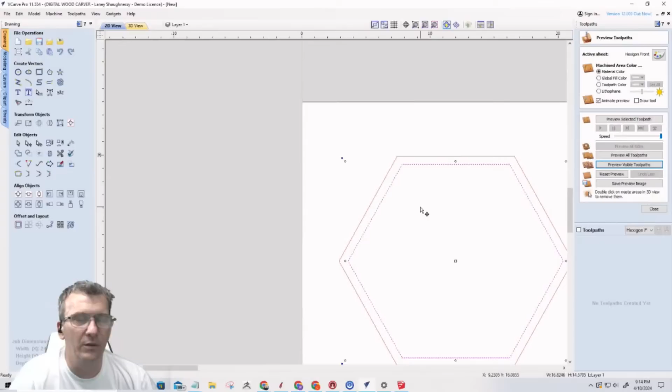I'm going to be screwing, and I don't want the screws too close to the edge. Let me go 0.625. Square corners, offset inward. Now this vector I would actually use on another sheet for a piece of acrylic to cut out. Plexiglass, Lexan, acrylic. I'm not a big fan of carving plexiglass, Lexan and extruded plastics. I like cast acrylic, and I've got some a little over 1/4 of an inch that would be perfect for this.

So this vector would not only serve the purpose of cutting my pocket out, but it'll also be my vector for cutting out the piece of acrylic. All right, now I've got to think about this for a second. I'm going to have a little overhang on the outside, then the acrylic. So this is just the outer edge. That's what the size of the acrylic is going to be.

Now I need to create my pocket vector offset inward. This is what I actually wanted: I wanted to come inward 0.625 on that. And between these two vectors, that's going to be a pocket toolpath.

This one is going to get offset one more time, but only about a 32nd. And so I'm going to have this vector, and this inside vector is going to be a pocket cut. I'm going to go 0.3. I think I'll have to go back and measure it, I want to say it's just a little over 0.25, but I'm going to go 0.3. And a quarter inch end mill, calculate. And this is going to create that pocket.

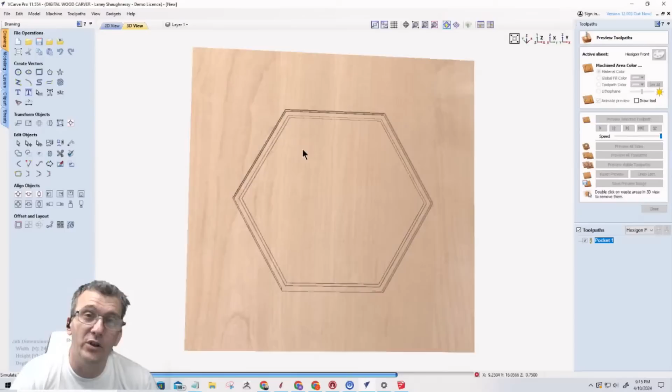Now, of course, on this piece, on this glued up panel, I'm going to have the good face facing down because this is going to now technically be the inside of my part here, right? So the face that I don't want showing is going to be up.

Now, there's going to be a profile cut on this slightly inside vector. Profile cut, cutting all the way through on the inside of the line. Calculate.

Now I'm taking that, I didn't put tabs in there just for preview purposes only, but that's going to create the pocket area where my acrylic's going to go. Okay, and then we'll have my profile cut on the outside of the line, and

Preview that visible toolpath. Now, you're not going to really be able to see the inside, and I do not want to have to go through the trouble of rounding off my acrylic. There's two ways that I could go about this. On this cut right here, when that router bit is coming in doing that pocket, it's rounding this off. So I know I'm using an eighth inch bit. I should be using a quarter inch on all of these. I don't know why I'm still on an eighth, I'll fix that, so a quarter.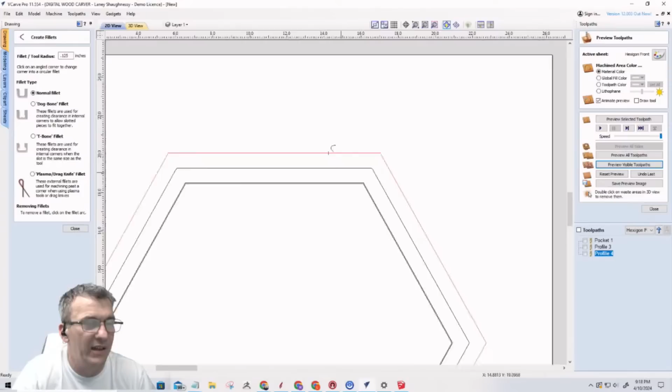So this is going to be an eighth inch radius right here. I might as well, if I'm going to use this vector for cutting out the plexiglass, put the fillet in there to begin with. So, you know, I might as well come in on these sides here and put that fillet in there because you can't fit a square peg in a round hole. And if I cut my plexiglass square, on the outside of that line, and then try to get it to fit into this curved pocket, I'm going to have to sand each one of those corners. So I might as well just do that now.

So that vector is going to be used to cut out the plexiglass, but it's also going to be used for my pocket. So let's recalculate these tool paths with a quarter inch bit, not an eighth. I don't need an eighth on this one. Calculate. Calculate. And that one's already there.

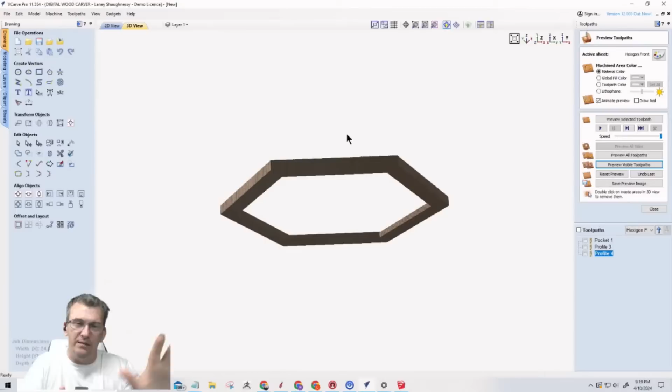All right, so I didn't add tabs to this because I just want to be able to kind of knock that part out. So you can see that's going to be that front window. And with John's input about recessing it in, right? So now it's going to be recessed in and flush, and we'll have a nice clean front, and that'll be pretty cool. So from the front side, that acrylic will have that half or that five-eighths of an inch lip coverage and everything, but it'll be five-eighths of an inch bigger all the way around. So that will be the front panel. That'll be the window, like a window for it. So that would be that.

So I'm going to go file, save as, and I'm just going to call this cat boxes for my Vectric. And I would just continue with that. So I've got my silhouette here and everything. When we go back, I should be able to, it should stay. So if I go back and look at that, preview.

So that front panel with the glass in it or plexiglass, right, you're actually going to have an extra three-quarters of an inch all the way around it too, because you're going to have the original box, the frame. So what John is pointing out is, imagine if you will, if I take this and I offset that outward three-quarters sharp corners, and then just for illustration purposes...

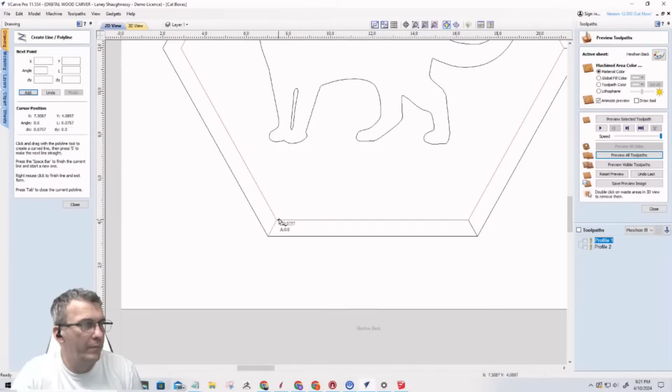I figured you guys would need something to eat. Oh, bless you. You're in town tomorrow? Yes. It's been a minute, missed that one completely.

Missed that one good, but that's all right.

It's visual. On this panel here, this one is offset inward, but it's still going to have that box around. Now if I take that vector, hold on a second, turn this one off, and copy that over to hexagon front.

What John is saying, if we make that active, is this is going to be that window, right? So this will be the window. It's going to have, this is the inside of that frame, but it's going to have the box around it also. So the window is going to be kind of a small little portal type window.

If we wanted the window to... I really wouldn't want the window to go all the way, but if I wanted the window to, I could bring this in a half inch and have a bigger window, right? Because this is my 3/4 inch outside box, the hexagon.

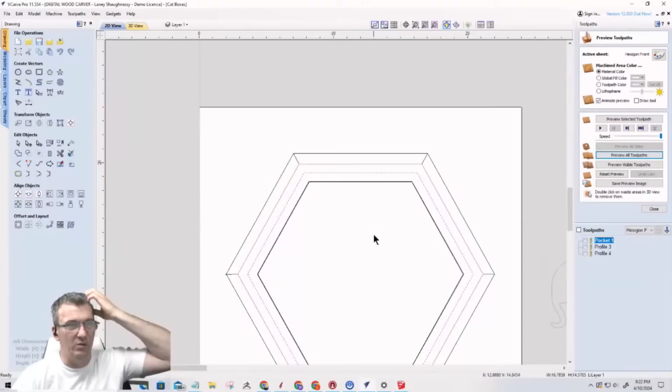And then this is the inside piece, right? So what John's saying is, with that box there, I'm going to have my inside piece and then the overhang and then the plexiglass. And this will all be solid. You won't see this line from the outside, right? So it'll all be solid and everything, just the window, but a kind of smaller portal with a wider outside, if you will. Right, John? Right, that's what you're indicating.

And if I wanted to, on my original part, if I just wanted to offset that in a half inch and then make a pocket there to make my plexiglass bigger, I could do that, right?

So that's that. Now these vectors here, that's the vectors. Hold on a second.

Well, I love the music, guys, but I don't want to get copyright struck by the music in the background.

So these are the vectors for that front, and it's just a matter of laying these out.

So this board here, coming back to make this active, these boards here are also 9.5, 1x10, and this is 20 inches. So 20 and 20 is 40. I don't want to go with a 40 inch long board and all, but all of these can be made out of...

All of these boards here can be made out of 1x10s, my 1x10 stock, whatever size I decide to lay it out. These two right here, those are 21 inches by 18. So 18 by 21, these are my inside, front and back.

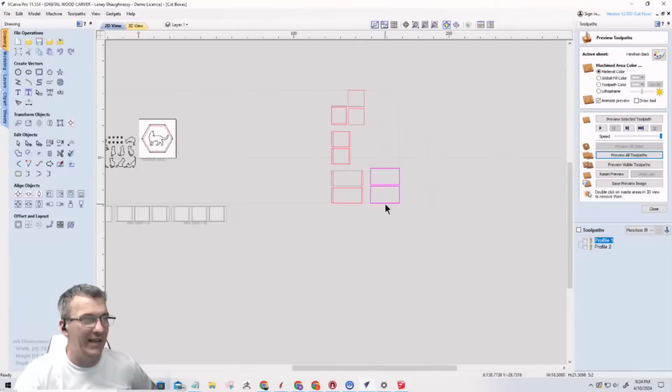These are also going to get silhouettes. Let me just do one of these right now so you can see here. I'm going to take this guy, and he's going to be probably somewhere like that.

I'm going to take this one. He's going to probably be somewhere like that. And...

I might, instead of paw prints, have like a mouse silhouette or something. But imagine, if you will, there would be like this paw print, which is not really a paw print, it's kind of rough drawn. But imagine a little mouse, and these two guys are focused on him, right? On what he's doing and everything. So that'll probably be one of my cutout windows, right?

And what I'm going for, for those of you that might be jumping in or joining in late, is the one that... let me see, did I have the other window?

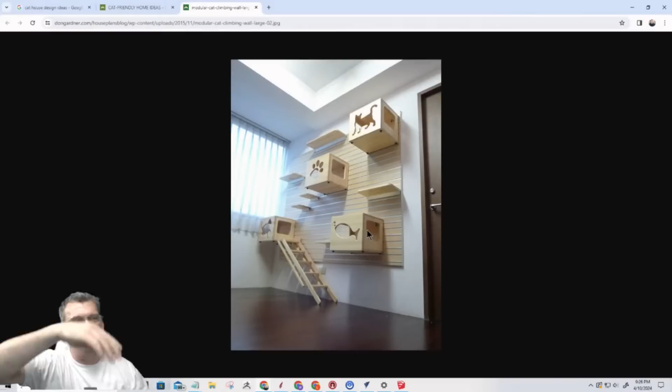Right here, so if you see these, open in a new tab here, these boxes with these silhouettes and everything. Now the cutouts on the side, of course, that's so it can get back and forth and all. The cutouts on the front are just so it can kind of hang out, play out, get through, whatever the case may be. I'm going to have some things like this.

I am going to do kind of a slat wall. I'll probably end up doing sliding dovetails, and I'll figure out how I will carve, attach them to the back of this.

But I'm a big fan of French cleats. They're solid. I don't think the cat jumping around would knock them off or anything like that. I think a French cleat wall would work, and there's tons of videos on making French cleat walls out there. I'm not going to even get into that right now.

But I like the idea of the little ladder and platform, but I really like the idea of the... go back one.

I like the little rope ladder. You can barely see it in the corner there, but I really want to do that. So I might drill a bunch of boards and use my CNC to drill the holes, or I could use a drill press and all, but do the rope.

Now this right here, this bed, it's just a front and back of that part, and then it's two or three flat panels - two that come down, one that comes across - and then those front and back are glued on. It's very rough, nothing too exciting or crazy about that. But that is basically it.

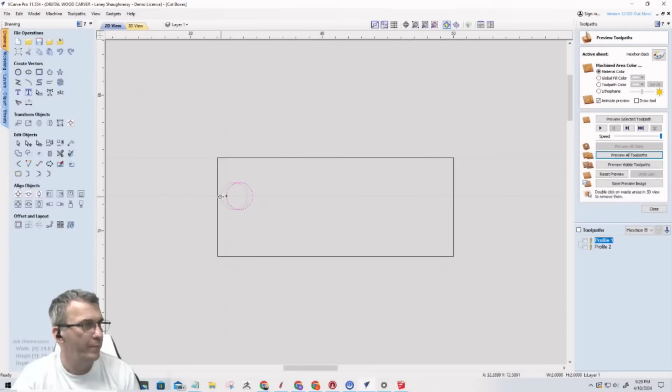Okay, and then I'll take a circle. We'll go with a 2-inch end. I'll snap that there, mirror that to the other side.

That was silly - the other side of the object that I'm on, right? So let me draw a line. That was mirroring it to the other side of the whiteboard down below. Okay, one more time, select that, and then I'll mirror that by flipping it about that line.

I'm going to take just a straight line for right now. And let me do this - let me do it backwards. I'm going to come here and hover over here. Now if I hit this it should work. If I hit the letter T, it should snap me right to the tangent there, which it did.

And again, I can take this line - I'm not done with this line yet, but when it's all said and done, I can mirror it by flipping it about that line. But I want to add some shape to it first before I do that. What I just did was with that line tool, I came down here and snapped it down there, locked it in, but I'm hovering it over this circle, not clicking anything. And if I hit the letter T, it'll snap straight to that natural tangent of that circle.

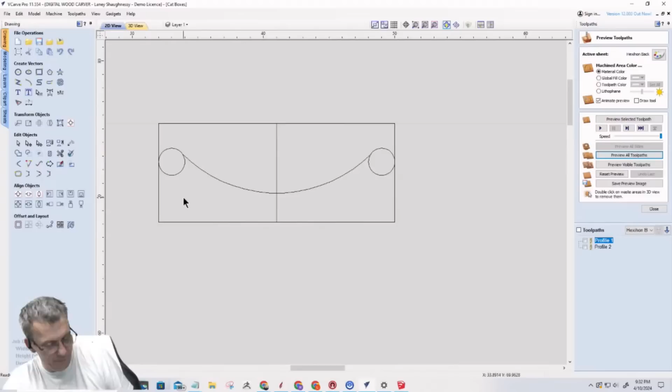Control Z. Let me take that - actually, I want this. Bear with me. I want that aligned, I want that. I want to insert a point - midpoint.

And I kind of want to, instead of an arc, pull it down. And then let me mirror that to the other side. So select that, mirror, flip about the line.

Now I'm going to go into my scissor tool, trim that, get rid of that for right now. That and that. And then I'm going to go to my fillet tool and put a little bit bigger than 1/8 of an inch - I'm going to put a 1 inch.

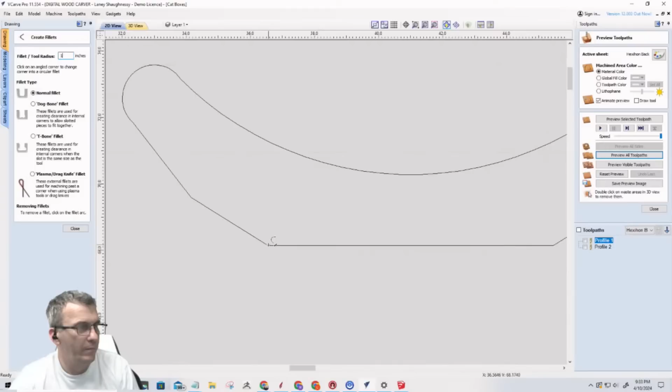There. And now in here, there would be - just so you understand what's going on - there would be a 3/4 inch board. It wouldn't be right at the bottom, this, but let me get it drawn. It could be a 1/2 inch, it doesn't have to be 3/4.

But there would be a board that this front is screwed to - it's kind of down low. There would be a board going across it. This would probably be a little bit shorter, it doesn't need to be that long. And that's thick, it doesn't need to be that long up here. But it would be just a platform - so here, one across and one up there.

And the front and the back are just screwed to it. Let's see if I open that in another tab.

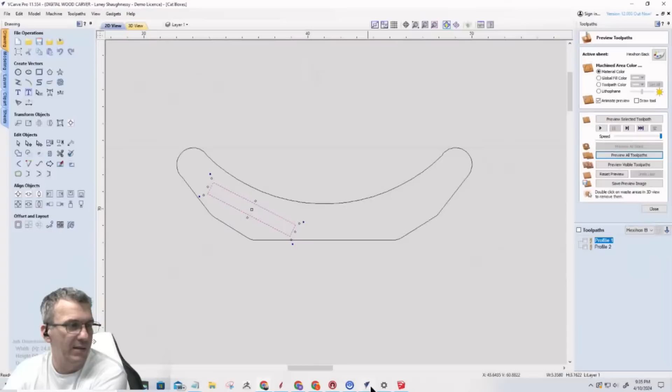So it's just the front and back that's here. And then this is screwed in. There's a bottom, and then there's another one on that side. It's very rough. You know, it's just something that'll hold a pillow, right? Type of thing. So it doesn't have to be very fancy and all that. But one of those will get thrown in there as well into the mix. You know, so two of those sides or something for him.

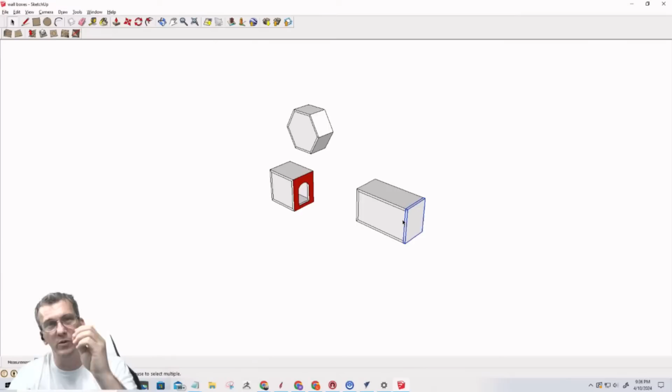The art of drawing things and visualizing things in SketchUp. If you really get decent at SketchUp, and it doesn't take long, I swear to you, it's very easy to learn. There's not a real big learning curve, and if you follow someone like Jay Bates who knows what they're doing, who goes through each of the tools and tells you how to use it, it's really good. It's really easy to learn, and all your furniture, whatever it is you're making that you want to visualize. Hell, I've had to make wooden panels for the inside of car doors for a customer, and glove box door panels and things like that.

And I enjoy drawing them in here. I enjoy bringing them in here, creating them so I can visualize them, talk with the customer, whatever I want to do. And it's easier for me to visualize with him in this type of an environment, without going to Fusion 360 or AutoCAD or something crazy like that. Right. Much easier to do it in here than to do it in Vectric and have them try to visualize what it would look like, laid out as all the vectors and everything. They can visualize it here.

So SketchUp, jayscustomcreations.com. Download the version 8 that he has. That's the free version before it went to a paid version, and then play around with it. I just wanted to show you the concept of bringing these things in. I actually have to make these this weekend, so I'll finish up the design, and I'll take some pictures when I get them on a wall and everything, of what it looks like. But importing them in and then laying out your parts, it's not too complicated, but it sure does help.

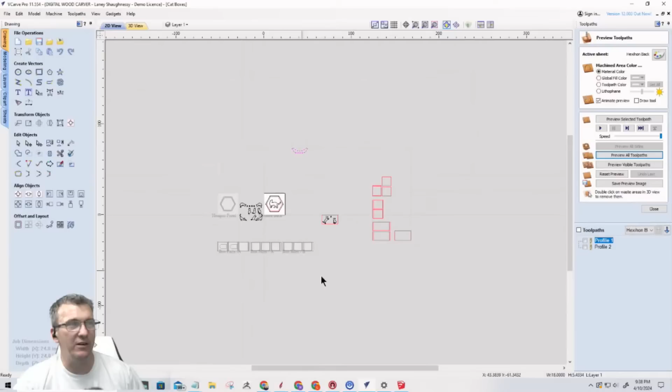It's easier for me, instead of trying to visualize the design, the box and the hexagon and the shapes and all of that stuff here, which I could draw out just like this and look at from a side view, lay out the blueprints and what I need to cut and all that stuff. SketchUp is a good tool. It's a good, useful tool. Very good to use in combination with Vectric.

All right, let me bring the guys up because we're getting late in the evening. Matt, I'm gonna pick on you for a minute. Matt, you're new, right? You're just a few days new with us. What do you think? I mean, was that too basic? Was it a good project? You can be harsh on me. That's what I like about you guys and girls when you're on screen with me. You can pick on me and say, nah, I knew all that stuff, you didn't teach me anything new. But have you ever used SketchUp? No, I haven't. I downloaded it and started playing with it when we were talking. Yeah, it's fun stuff. It's a good program to play with.